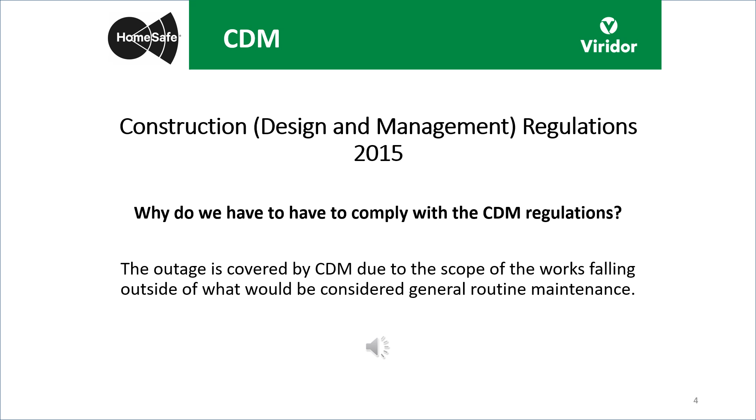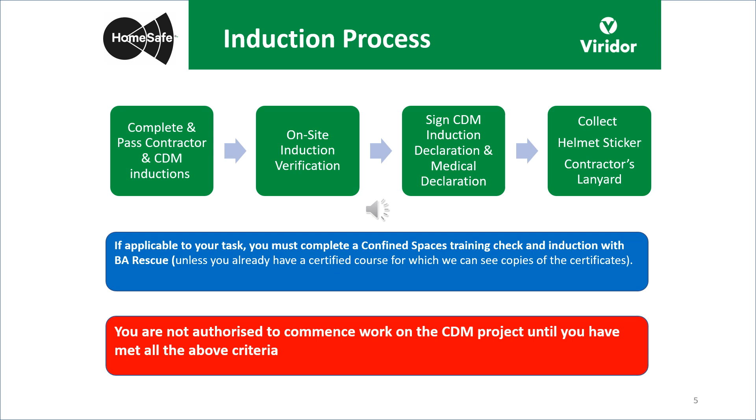BA Rescue will be providing confined space management and security services on site. Please think of them as an extension of the Viridor team, and they'll be able to answer any questions you may have around confined spaces or safety in general.

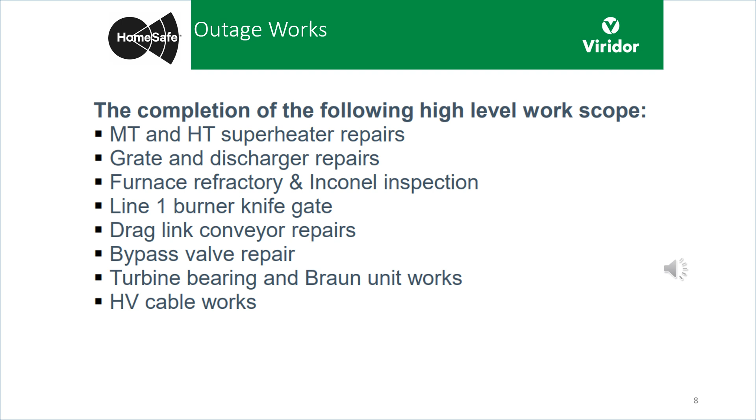Your employer must provide all of this. PPE will be monitored at all times on site, and any non-conformances with the standards will be raised with the individual and their line manager.

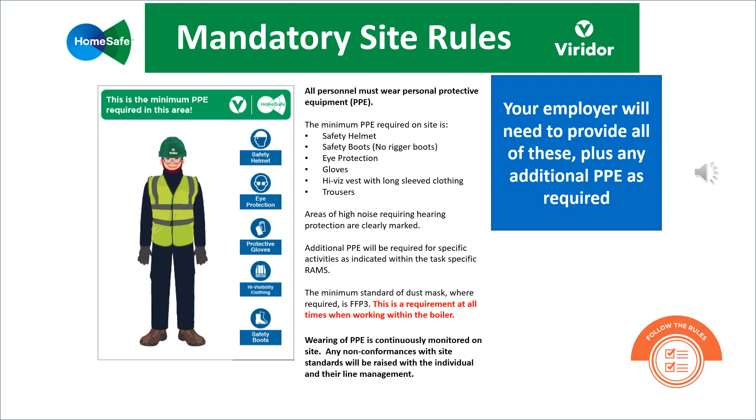Due to the reactive nature of this year's outage, the welfare and site layout will be split into two phases, which are detailed in this slide pack. This stage details the plans for the period between the 2nd of April and the 6th of April.

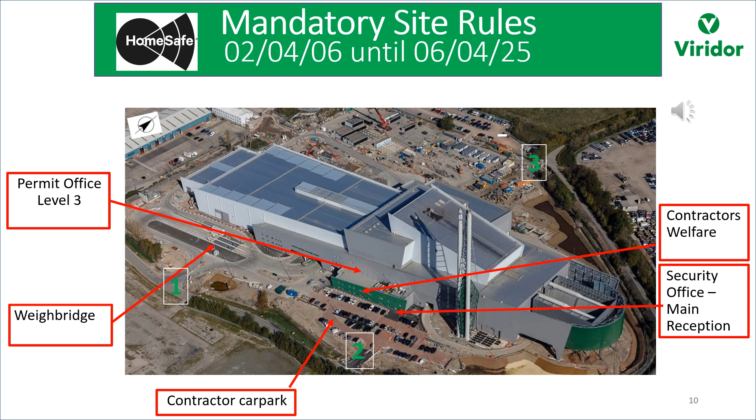The welfare will be in the Polymers building, which will be directed via signage from the main entrance to the ERF. The permit office is in the usual place on level 3 of the admin building.

During the initial stages, between the 2nd and the 6th of April, you must always enter and leave site through the ERF reception. This can be found at the entrance to the site and is displayed on the screen. You must sign in and out when leaving site at any time.

From the 2nd until the 6th of April, please ensure that you always leave site via the ERF reception. This can be found on the screen and is at the entrance to site via Gate 2. You must sign in and out when leaving the site at any time.

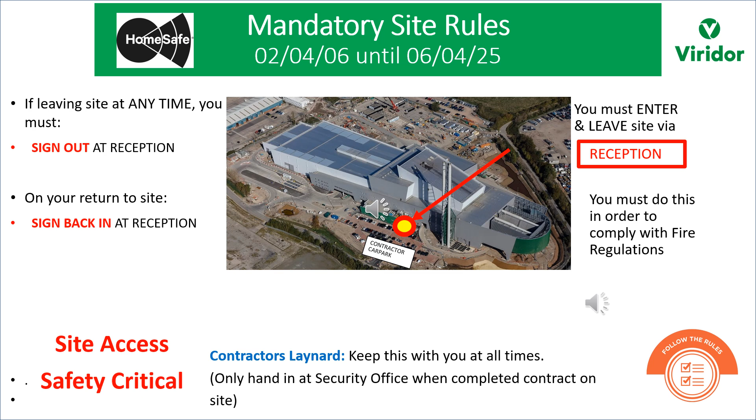From the period of the 2nd until the 6th of April, you must always enter and leave site through the ERF main reception, ensuring that you sign in and out using the book. This is to ensure that we comply with fire regulations, and should there be a fire, we know who is on site at all times. The ERF reception can be found at the entrance to site as displayed on the screen.

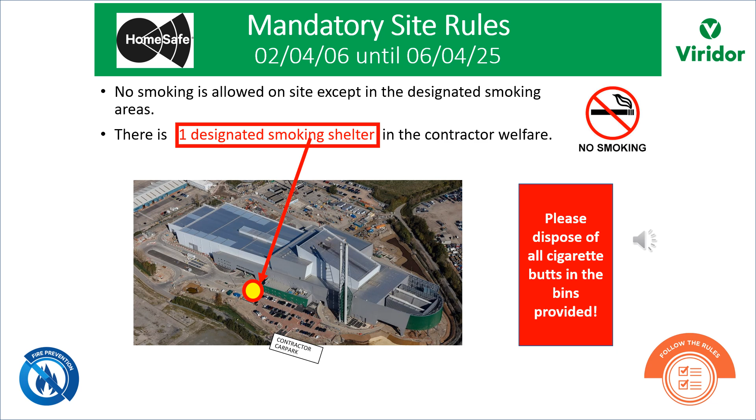There is strictly no smoking or vaping anywhere on site apart from the designated smoking area. There is a designated smoking shelter shown on the screen, which is at the front of the ERF. Please ensure you dispose of all cigarette butts in the bins provided.

From the 2nd of April until the 6th of April, the muster point is located in the ERF main car park. All contractors must make their way there as quickly as possible and make sure that you have been accounted for by the Viridor Fire Marshals. You'll only be allowed back into your work area when the all clear has been given by a member of the Avonmouth ERF staff.

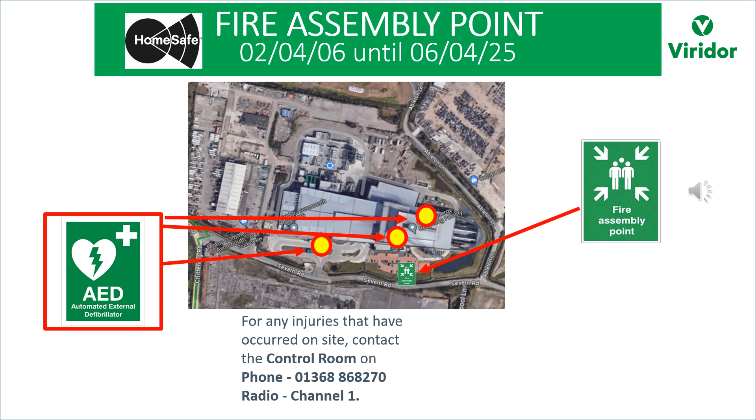Do not leave site unless instructed to do so by Avonmouth ERF staff. There are also a number of automated external defibrillators on site, including the weighbridge, the level 4 control room, and the ground floor of the boiler hall.

As previously mentioned, contractor welfare will be split into 2 phases. From the 2nd until the 6th of April, car parking is located at Gate 2. Remember, you must reverse park. Please car share wherever possible.

The offices and welfare facilities will be clearly signposted from the Avonmouth ERF main reception. Female toilet facilities will also be available. You as a contractor are fully responsible for the security of your own belongings and equipment whilst you are on site.

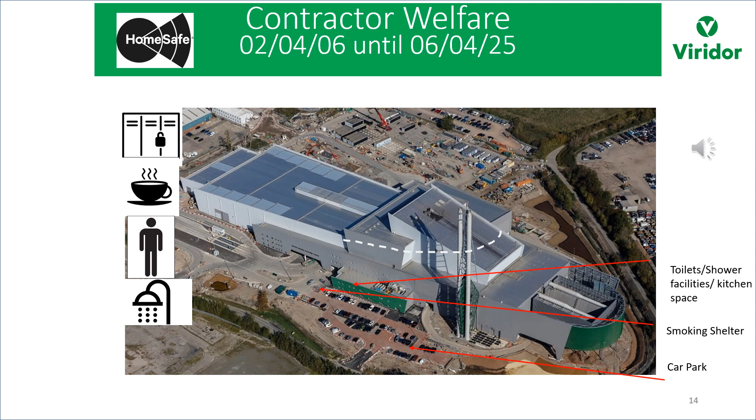The following slides detail the arrangements for Phase 2 of the welfare arrangements from the 7th of April onwards. Here is an aerial view of the site.

The weighbridge is located at Gate 1. The entrance to the Viridor Staff Admin Car Park is located at Gate 2. Entrance to the contractor car park and welfare facilities from this stage onwards is located off Ableton Lane at Gate 3. There will be road signage to direct you to the Outage Village on the north of site.

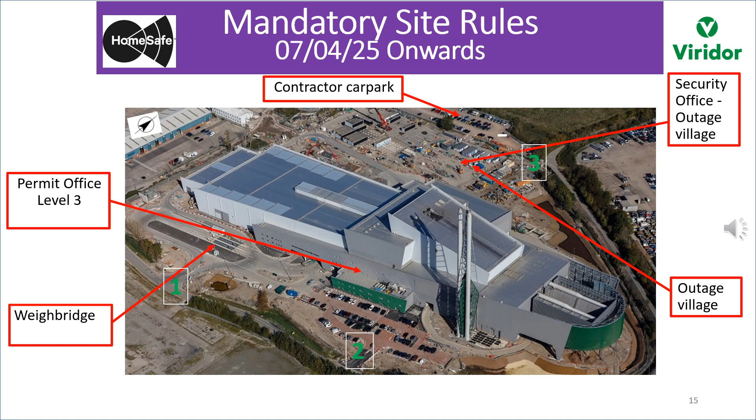The security office is at the entrance to the Outage Village. The main admin building is on the south side of site. The permit office is located at level 3 of the admin building.

From the 7th of April onwards, the muster point is located in the Contractors Village car park. All contractors must make their way there as quickly as possible and make sure you've been counted for by the Viridor Fire Staff Marshals. You will only be allowed back into your work area when the all clear has been given by a member of the Avonmouth ERF staff. Do not leave the site unless instructed to do so by Avonmouth ERF staff.

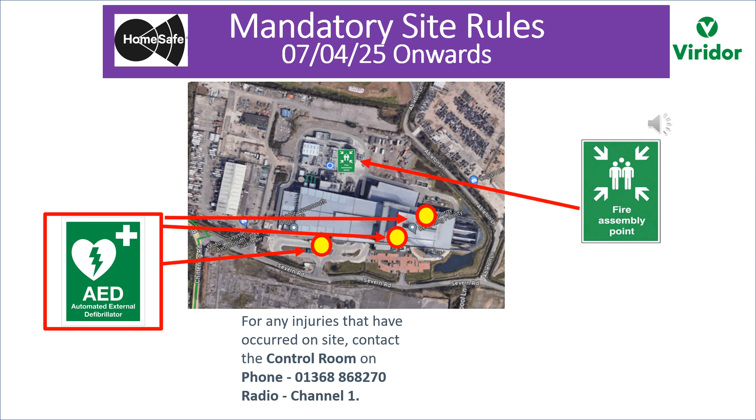There are also a number of automated external defibrillators on site, which are located at the weighbridge, the control room on level 4, and the ground floor of the boiler hall.

Contractor welfare from the 7th of April onwards. Car parking will be located at Gate 3 off Ableton Lane. Remember, you must reverse park, and please car share wherever possible.

Offices and welfare facilities will be clearly signposted. A female toilet facility will be available in the Outage Village. From this phase onwards, under no circumstances should contractors be using the Viridor staff facilities.

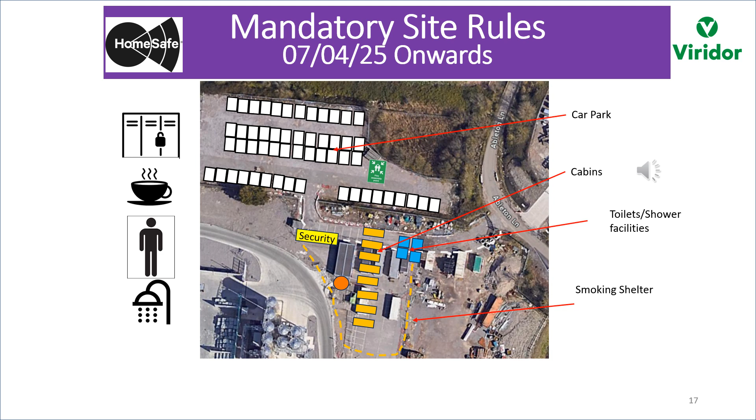You as a contractor are fully responsible for the security of your own belongings and equipment whilst you're on site.

From the 7th of April onwards, you must always enter and leave site through the security office and sign in and out via the sign-in book. This is to ensure that we are complying with fire regulations and are aware of who is on site should there be a fire.

The site security office can be seen on the screen.

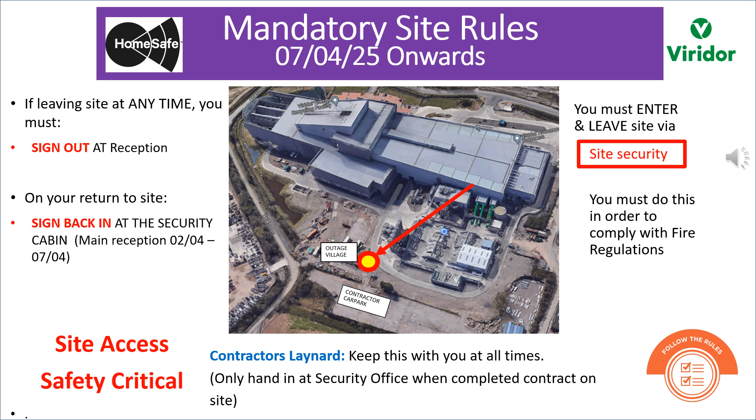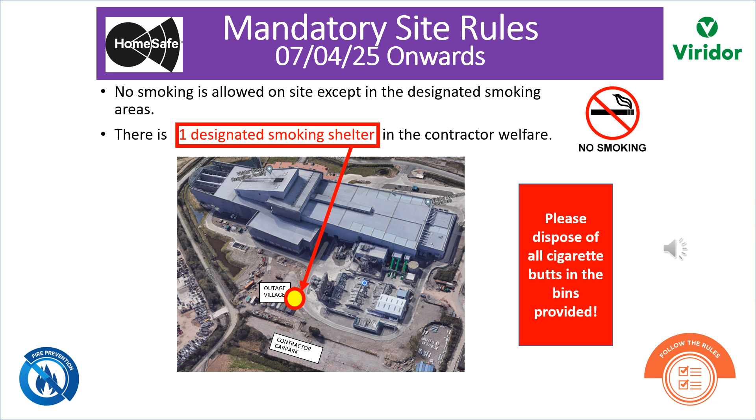No smoking is allowed on site except in designated smoking areas. This includes vaping. From the 7th of April onwards, there will be a designated smoking shelter in the contractor's welfare. Please ensure you dispose of all cigarette butts in the bins provided.

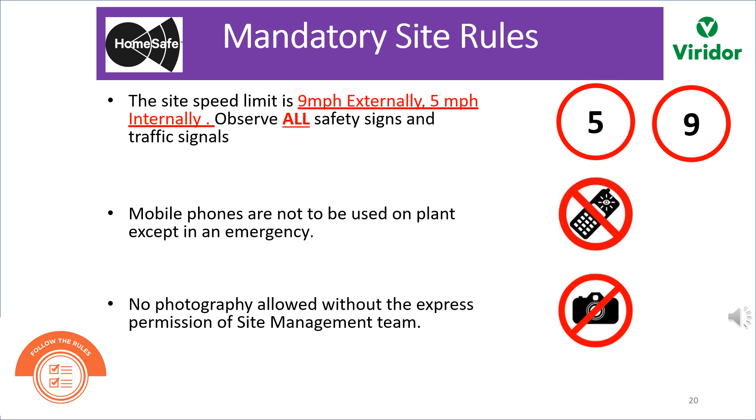It is strictly forbidden to steal, cause willful damage, consume alcoholic drinks or drugs, or bring illegal substances onto site, or engage in any other activities which could jeopardize the safety of any person. Such behavior will not be tolerated.

Viridor reserves the right to conduct random searches of both people and vehicles entering and exiting site. Entry may be refused, or you may be asked to leave site, if items found during a search cause concerns for the health, safety, and welfare of all on site.

If you do not comply with the site rules, you may be issued with a yellow or red card. A red card means you have to leave the site immediately, and listed on the screen are just a few examples of the infringements that could lead to a card being issued.

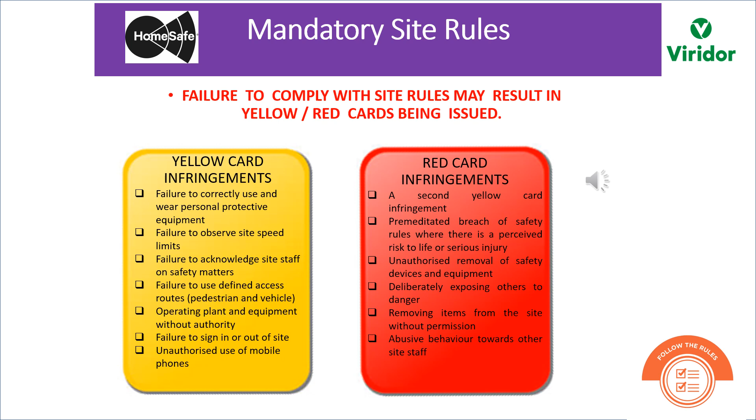The Operations Control Room is responsible for coordinating all emergency responses for fire, first aid, or spillages, and this would be done through the duty shift team leader.

If you discover a fire, raise the alarm immediately and inform a member of the Avonmouth ERF staff. Everyone on site must go to the muster point as quickly as possible if the evacuation alarm sounds. Not responding or responding slowly may lead to a yellow card being issued.

Our fire alarms are tested weekly at 10 o'clock every Thursday. When the alarm goes off at this instance, please do not do anything. If the alarm continues to go off, or you hear the alarm at any other point during the week, you must proceed to the muster point immediately.

The tap water in the welfare facilities is drinkable and there will be bottled water available on plant. Please ensure that all of your waste is placed in the bins provided and ensure that all electrical equipment brought to site is PAT tested.

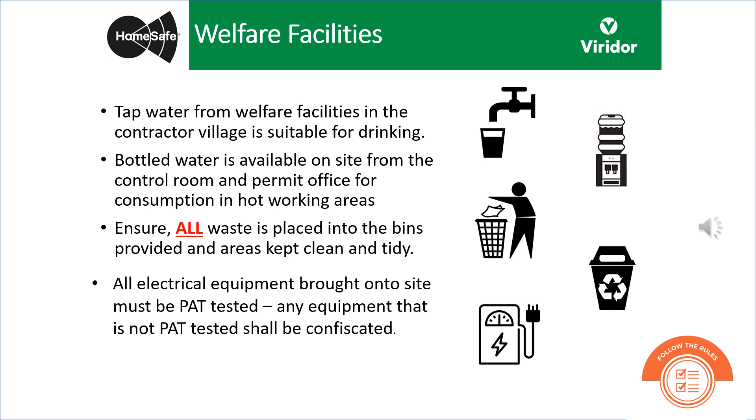All tasks require a safety document. Your risk assessment and method statement must be provided a minimum of 72 hours in advance of work commencement. A Viridor Senior Authorised Person, or SAP, will issue your safety document to protect you from system-derived hazards. The Point of Work Risk Assessment, POWRA for short, must be collected from the permit office when your safety document is issued.

The POWRA must be completed by your nominated supervisor before work starts. General safety must be established by the nominated supervisor and recorded on the POWRA before the start of each working period. Any questions you have on this process, please contact a member of the ERF staff.

This slide will discuss certain aspects of the permit system. All permits must be surrendered each time you leave site, and at the end of every day, at the permit office only. Hot work requires a specific permit due to the fire alarm and automatic sprinkler system. No hot works can be undertaken without a permit.

General safety. General safety includes, but is not limited to: ensuring you are using the correct tools and equipment, safe access and egress, the correct working method for the job location, the correct PPE for the task, and the working area itself. This is a supervisor's responsibility. Working areas must be tidied up in line with your POWRA safety requirements.

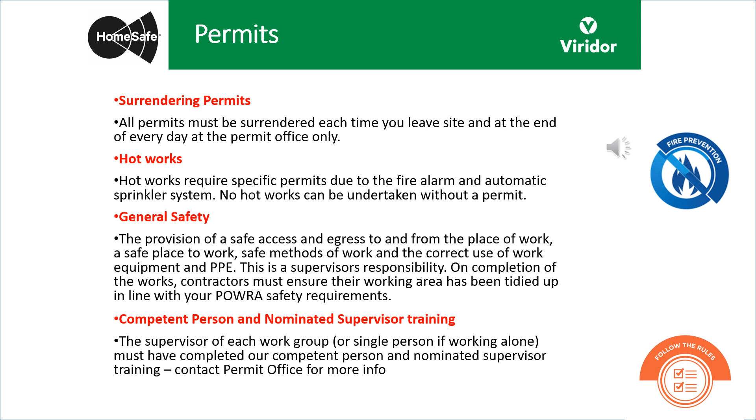Competent person and nominated supervisor training. The supervisor of each work group, or single person if working alone, must have completed a competent person and nominated supervisor training. Please contact the permit office for more information.

The most common confined spaces on site are as follows. To enter or work in a confined space, you must have the correct training, certification, equipment, and permit before entering. You must log in at the entrance and hand over your tally tag.

You may exit the confined space at a different level from which you entered it, so you must return to your entry point to log out and pick your tally tag back up. A klaxon or air horn will be used as the evacuation signal for confined spaces.

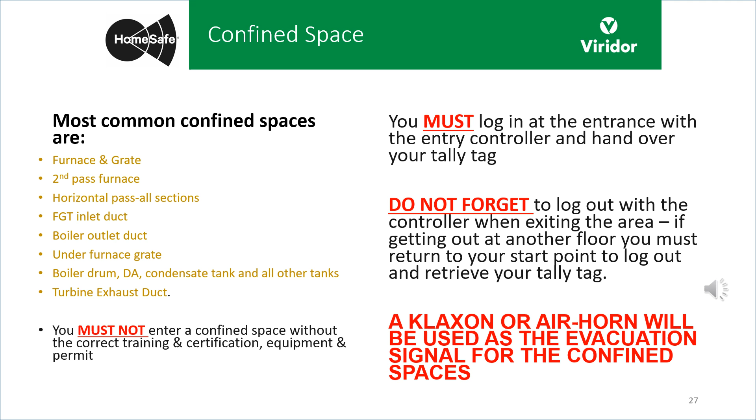Working at height will be part of the risk assessment and method statement produced before commencement of any work. This can vary from the use of a MEWP to the use of rope access. Please ensure that what is written in the RAMs provided is followed exactly, clip on where appropriate, and use the access equipment correctly.

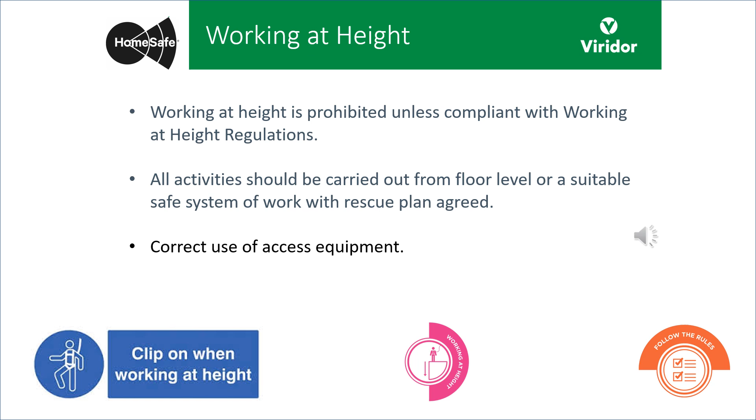If using ladders, then they must be inspected by a competent person and have correct inspection tags. Always visually inspect ladders before use and ensure that they are stored correctly. It is Viridor's policy that ladders are used for access only and should not be used for work that could go on for a considerable amount of time. Please consult your supervisor if you are unsure of any of this.

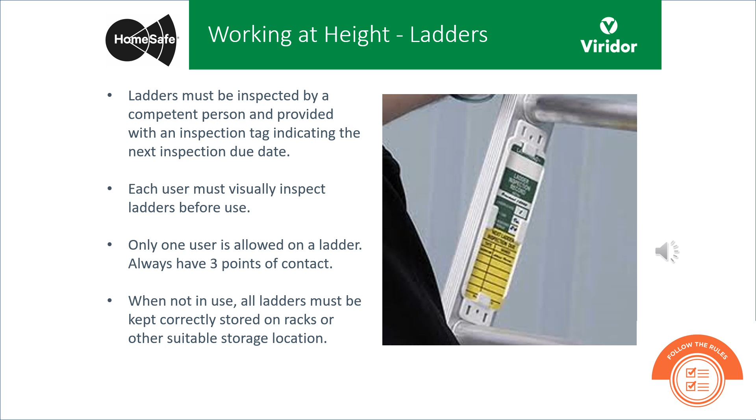All scaffolding must be erected, maintained and inspected in strict accordance with current legislation and only by competent, authorised personnel. The scaffolding team for the Avonmouth ERF outage will be Raynham's, so please consult them for any questions on scaffolding.

Before using it, you must carry out your own individual visual inspection, and if you have any concerns or find any defects, report them immediately to a member of the Viridor ERF staff and Raynham's, and do not use the scaffold until it's been properly inspected and repaired.

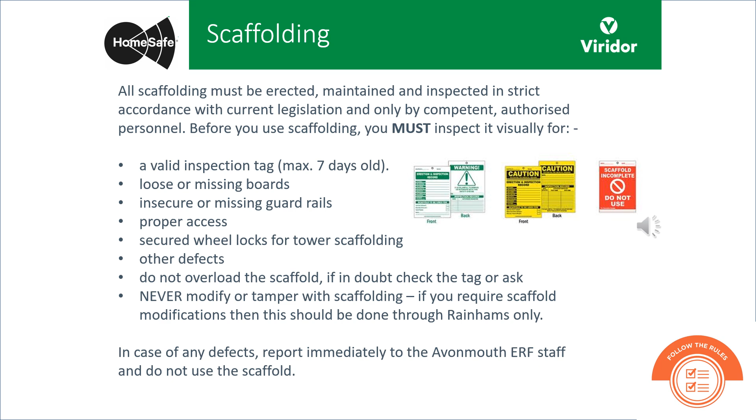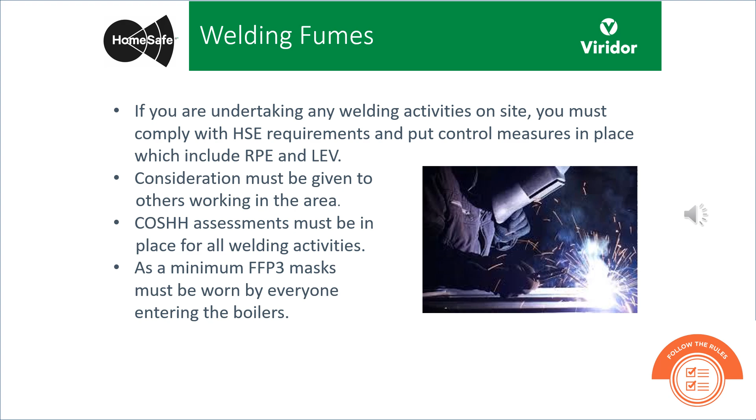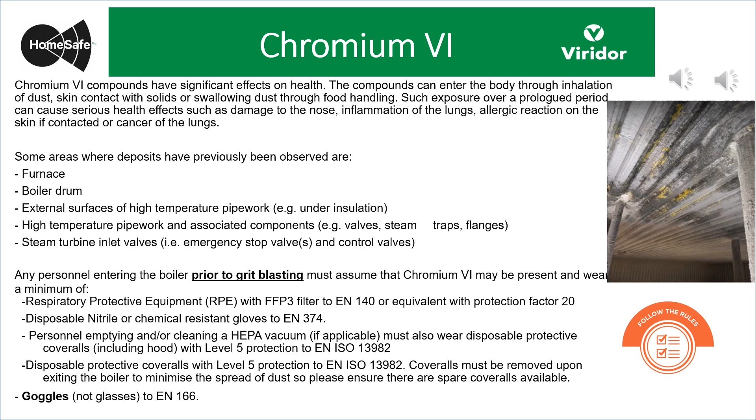Should chromium-6 be observed in any areas that are not included in the grit blasting regime, please stop work and raise this with the management team so that we can reassess and ensure that sufficient control measures are in place. If you have any questions regarding this process, please reach out to the ERF management team.

Report all spillages immediately to a member of the Avonmouth ERF personnel and contain the spillage according to procedures. Spillage kits are located around the facility and are clearly signposted.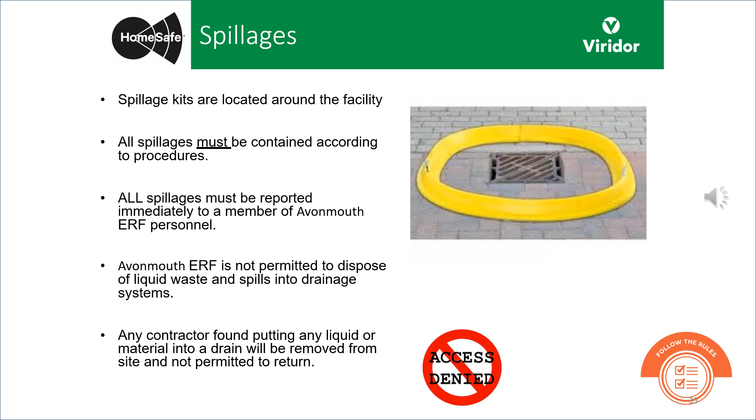Please be aware that there are areas and parts of the site that will remain fully operational during the outage. This includes the exit and entrance to the tipping hall and the store's delivery area. The Viridor polymers plant will be partially operational throughout the duration of this outage.

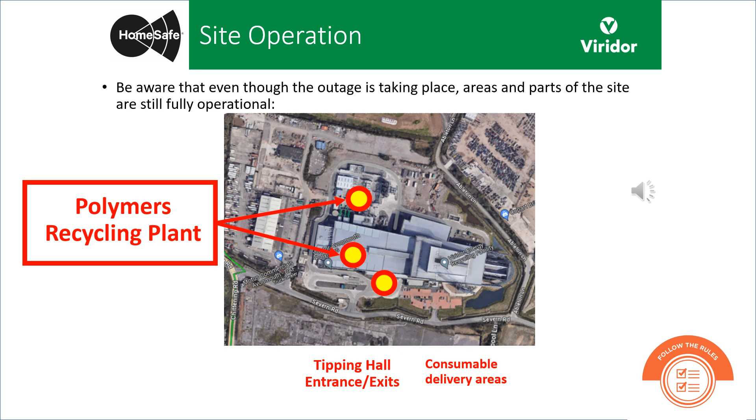So remember, stay in your designated area. You must ensure that you have correctly identified the plant or equipment before commencing work. Don't start work if you have any concerns at all about the equipment or the isolations, and remember, no work can be carried out without a permit.

Good housekeeping helps prevent accidents. Remember to keep your point of work clean and tidy, ensuring walkways are kept clear and all litter is disposed of in the bins provided. Don't rely on others. Good housekeeping is everybody's responsibility.

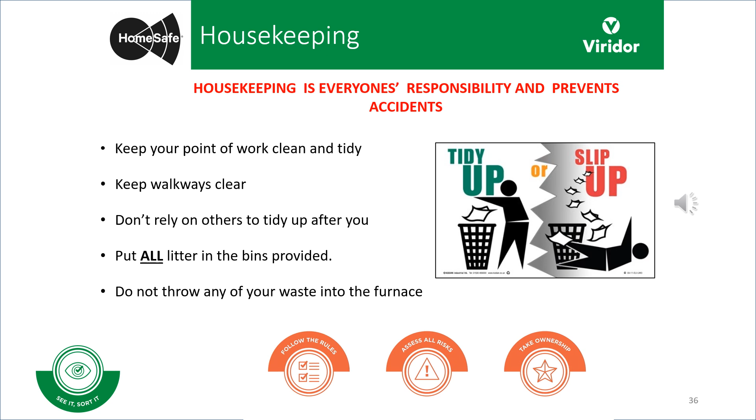Good, clear communication is vital and will help support a successful outage. There will be a daily team meeting and progress meetings at 9 o'clock in the morning in the ground floor admin block meeting room. These will be attended by the site management team, the SAP, the STL and a supervisor from each of the contractors.

Be aware that there will be a higher volume of people on site than normal, and that many of them will be unfamiliar with the site. Think about the tasks that you're doing and how it might impact on others. Look out for one another, even if they're not part of your team. We all want a successful outage and a safe outage.

Channel 3 is used for the Viridor and engineering maintenance team. All contractors will be on channel 6, 7 and 8. Please be respectful and limit use to essential communication only. All work parties must have at least one radio. All radios must be signed in and out via the BA rescue team.

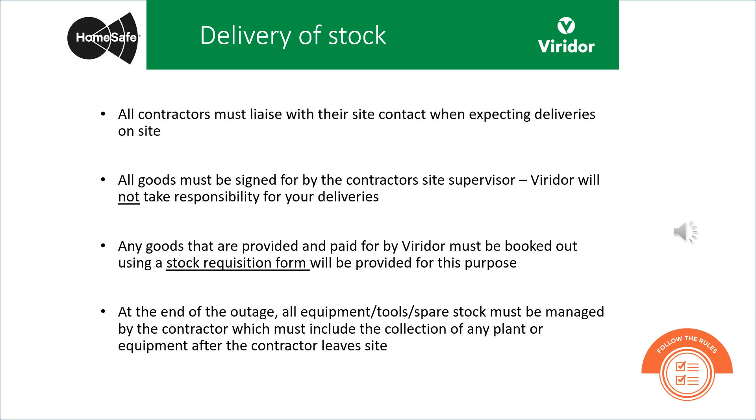Contractors are responsible for managing the removal of equipment, tools, spares and stocks from site. Anything left over after the outage is finished may be removed from site.

As a waste management site, we have a duty of care to inform you of a disease called leptospirosis or Weil's disease that is transmitted to humans through contact with infected rat urine. This is a serious and sometimes fatal infection that can start with flu-like symptoms but can lead to serious complications and possibly death. You can reduce the risk of transmission by wearing protective clothing and washing your hands after working on site and always before eating, drinking or smoking.

There are various bait boxes on site and we have a pest control service agreement in place. If you have any questions, please speak to a member of Viridor staff.

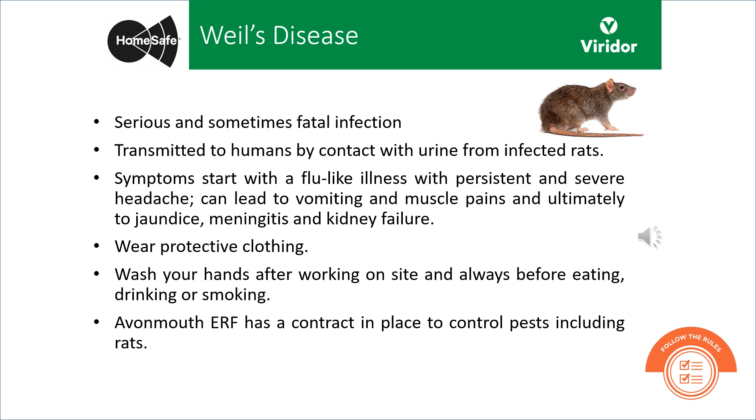CCTV operates across the whole site and is used for safety and security purposes. Please be aware that you will be on camera whilst working, and this can be used in the event of accidents, near misses, and for general site compliance.

Finally, I'd like to thank you very much for your time today, and please remember that if you're unsure about anything, you must ask. There's no such thing as a silly question, and never assume. Let's ensure that everybody gets home safe.